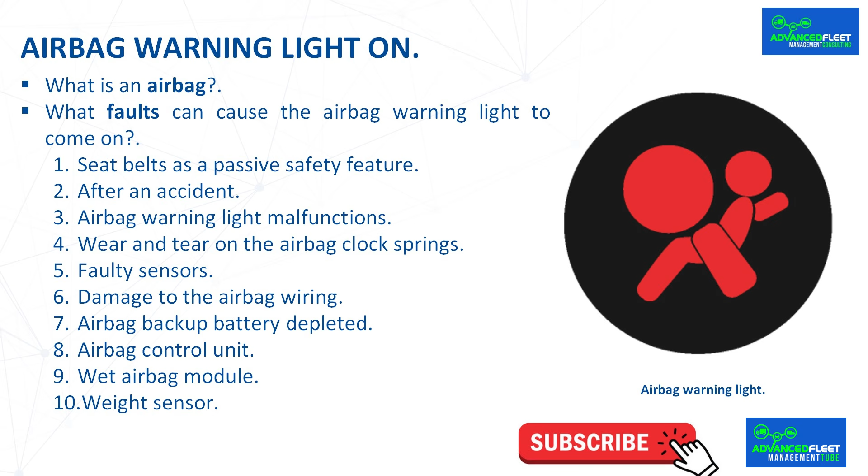Airbag warning light on. What is an airbag? Airbags increase safety inside the car, as their function is to prevent the driver and passengers from hitting any part of the passenger compartment, such as the steering wheel, doors, or any other element.

The airbag is one of the fundamental passive safety systems incorporated into cars, and one that we don't usually think about until a warning light comes on in the instrument panel, either because we have had an accident or because there has been a fault.

When the airbag warning light comes on, it means that the system is not operational. For safety reasons, the car alerts us that this airbag is disconnected and will not work when needed. Therefore, it is essential to fix this problem as soon as possible.

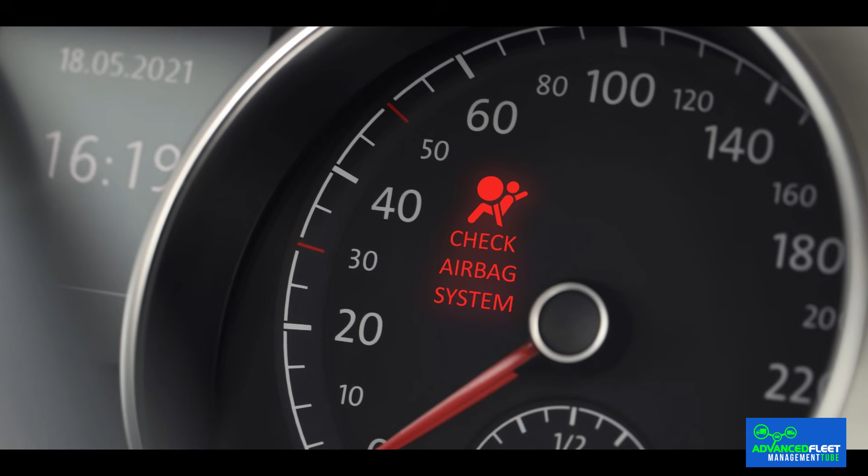It is not safe to drive with the airbag warning light on. The light indicates that there is a problem with the airbag, so in the event of an accident, it may not deploy properly. This reduces the effectiveness of the vehicle's safety features. Therefore, it is important to address the problem immediately to ensure safety.

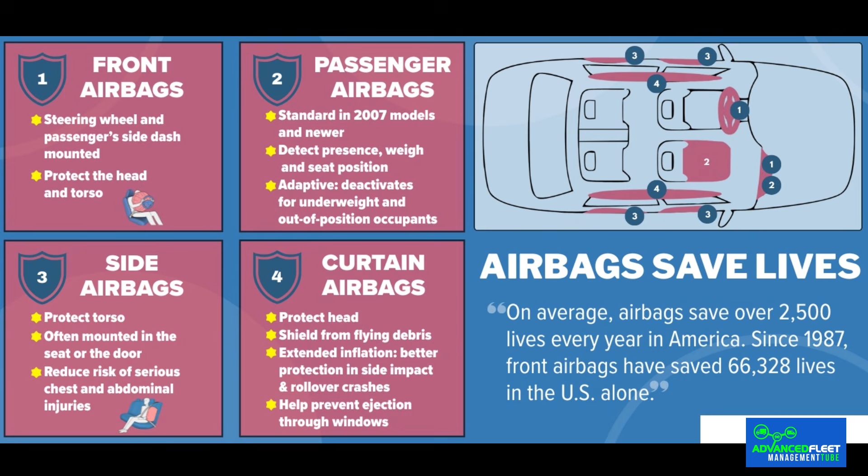What faults can cause the airbag warning light to come on? The airbag light, which may be red or orange depending on the manufacturer, does not indicate which specific airbag is malfunctioning. It could be the driver's airbag, the passenger's airbag, the curtain airbag, the side airbag, or even the pedestrian airbag, which is stored under the hood of some cars and deploys to improve pedestrian safety in the event of a collision. Seat belts as a passive safety feature.

The airbag light may also come on due to the position of the seat belt. The seat belt buckle, where it is attached to the car body, has pretensioners that, in the event of an accident, prevent it from retracting and the passenger's body from being thrown forward.

For example, when we are at a traffic light and someone rear-ends our vehicle at low speed, these pretensioners are activated, even without the airbag being deployed, as the airbag only inflates in the event of sudden deceleration. If there is no impact, the airbag will not deploy.

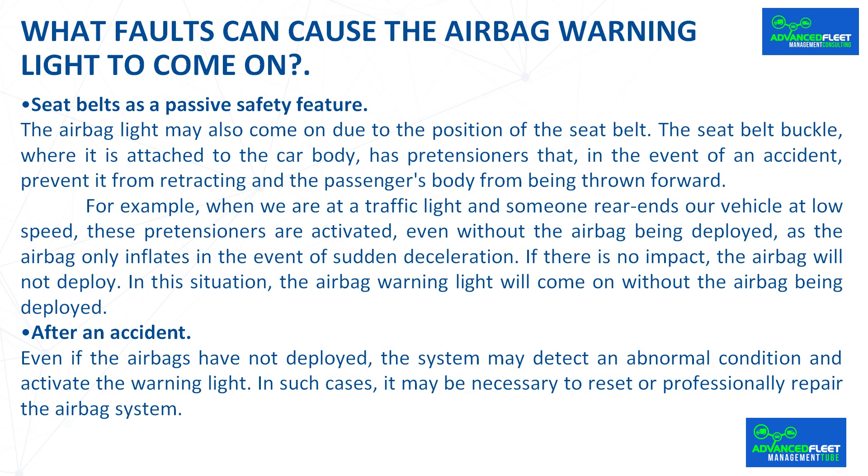In this situation, the airbag warning light will come on without the airbag being deployed. After an accident, even if the airbags have not deployed, the system may detect an abnormal condition and activate the warning light. In such cases, it may be necessary to reset or professionally repair the airbag system.

Airbag warning light malfunctions. The airbag warning light on the instrument panel usually illuminates when there are faults in the connections. Airbag cables are usually located under the driver's and passenger's seats. If the seat is moved to slide the bench forward or backward, these cables can sometimes be damaged.

The solution is to disconnect and reconnect these cables. If the warning light is no longer present when you start the vehicle, the airbag problem has been solved. Some manufacturers recommend soldering these cables to prevent them from becoming disconnected and subsequently failing.

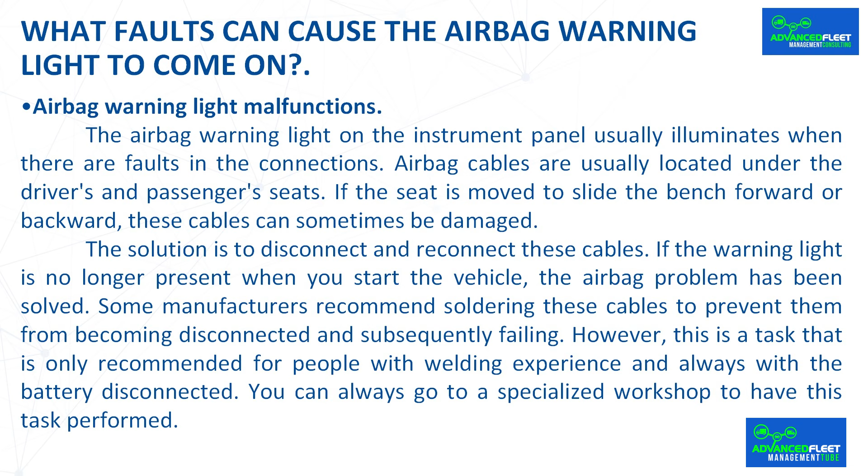However, this is a task that is only recommended for people with welding experience and always with the battery disconnected. You can always go to a specialized workshop to have this task performed.

Wear and tear on the airbag clock springs. One of the steering wheel components related to the airbag is the airbag clock spring. This component can wear out over time as it is constantly manipulated in its location. It connects the bag mounted inside the steering wheel to the electrical system.

This is a serious problem, as it renders the system inoperative in the event of an accident. In this case, removing the steering wheel is complex and requires diagnostic devices to reconfigure the system. It is best to go to a repair shop where you will be charged between €300 and €400.

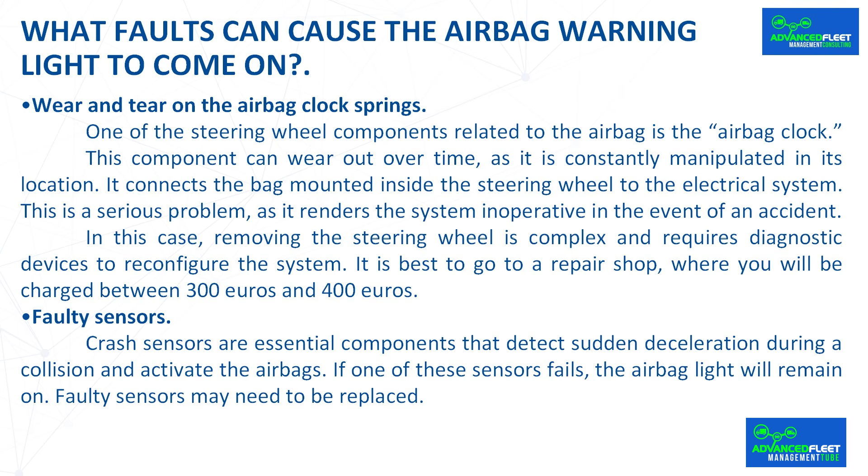Faulty sensors. Crash sensors are essential components that detect sudden deceleration during a collision and activate the airbags. If one of these sensors fails, the airbag light will remain on. Faulty sensors may need to be replaced.

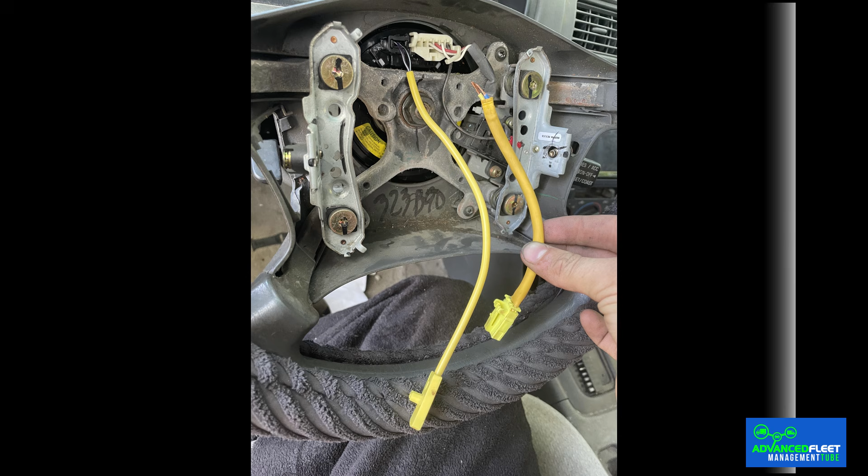Damage to the airbag wiring. Problems with the airbag system wiring can cause false signals or prevent the airbag from deploying. This can occur due to corrosion, wear and tear, or if the wiring has not been handled carefully during repairs.

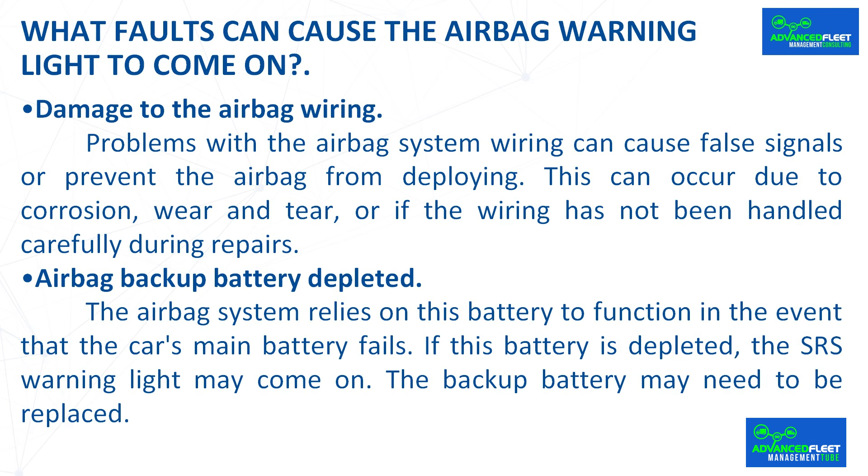Airbag backup battery depleted. The airbag system relies on this battery to function in the event that the car's main battery fails. If this battery is depleted, the SRS warning light may come on. The backup battery may need to be replaced.

Airbag control unit.

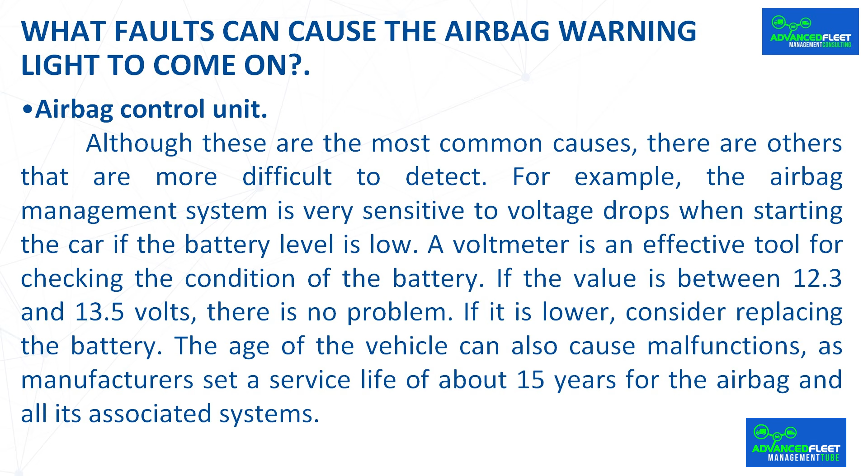Although these are the most common causes, there are others that are more difficult to detect. For example, the airbag management system is very sensitive to voltage drops when starting the car if the battery level is low. A voltmeter is an effective tool for checking the condition of the battery.

If the value is between 12.3 and 13.5 volts, there is no problem. If it is lower, consider replacing the battery. The age of the vehicle can also cause malfunctions, as manufacturers set a service life of about 15 years for the airbag and all its associated systems.

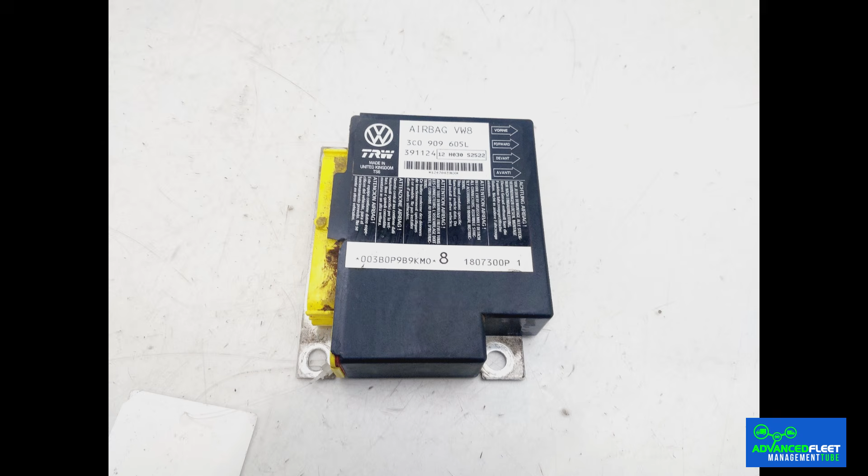Wet Airbag Module. The airbag can be damaged if exposed to external agents such as water. This is one of the most common reasons why the airbag warning light comes on without the need for repair. This usually occurs in cars that have been exposed to heavy rain, such as in the case of flooding, or in cases where the owners have spilled liquids on the seat.

In today's cars, the airbag module is located just below the seats. It is usually upholstered and waterproofed, although frequent use can wear out these coverings. Corrosion of the module due to moisture can activate the emergency warning lights.

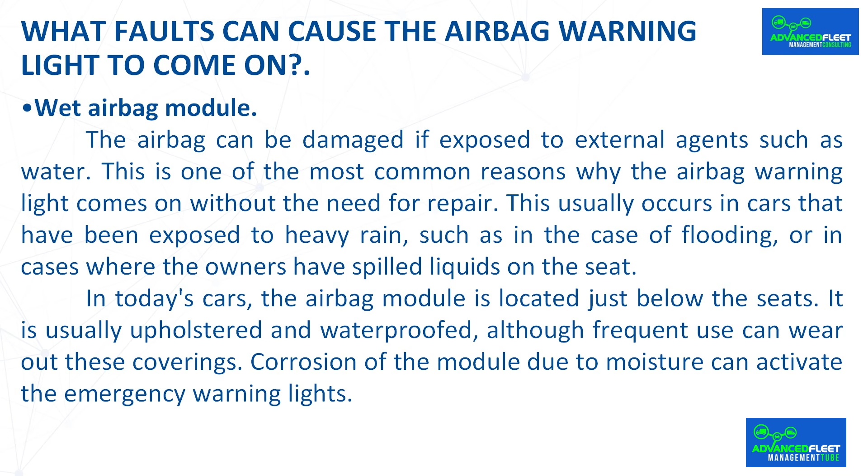Weight sensor. A fault in the passenger seat weight sensor is another possible malfunction related to the airbag warning light. This sensor determines whether someone is sitting in the passenger seat and is activated when a minimum weight is exceeded. It is very important that this sensor works properly. If it is not operational, the airbag will not activate in the event of an accident.

This sensor is designed to save costs in the event of an accident. Why would an airbag deploy if there is no one in the passenger seat?

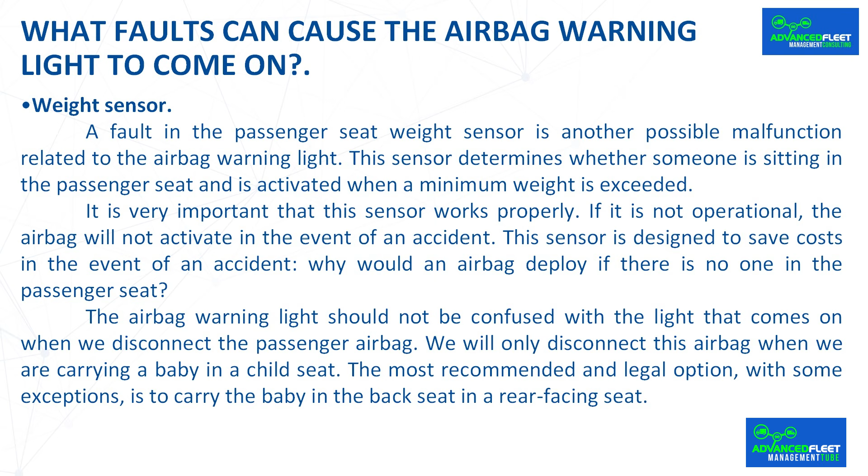The airbag warning light should not be confused with the light that comes on when we disconnect the passenger airbag. We will only disconnect this airbag when we are carrying a baby in a child seat. The most recommended and legal option, with some exceptions, is to carry the baby in the back seat in a rear-facing seat.

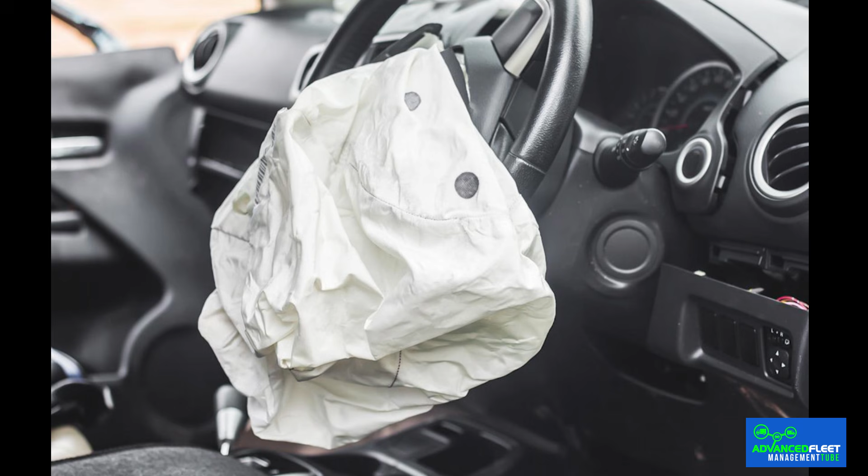Replacing an airbag is expensive. In most cases, when an airbag has deployed, the steering wheel must be replaced except for the rim because the bag is integrated into this part. In the case of the passenger seat, the part of the dashboard where the bag deployed must be replaced.

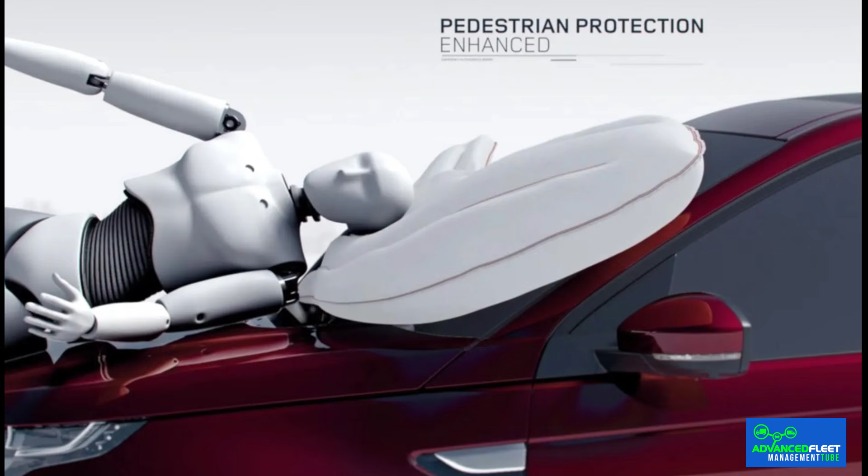If the pedestrian airbag has been activated and has not been damaged, it does not need to be replaced like the others. It could be put back inside the hood at the height of the windshield wiper so that it would work again. However, in this case, the light would remain on and would have to be removed from the diagnostic system. The cost of replacing this part is high, exceeding €300, because, in addition to the airbag, the control unit and electrical system must be replaced, as recommended by the manufacturers, and subsequent programming must be carried out.

Airbag failure. Serious defect in the MOT. One of the procedures carried out during the vehicle technical inspection MOT is to check that the airbag is working properly. During the inspection, they check that the airbag warning light goes out a few seconds after turning on the ignition and starting the vehicle's engine. If the warning light does not go out, it is considered a serious defect and the MOT will be unfavorable.

Implications for fleet management. The main consequence of the airbag light being on is that the airbag will not deploy in the event of an accident with possible injuries to the vehicle occupants, and the vehicle will not pass the MOT test. The following measures are recommended.

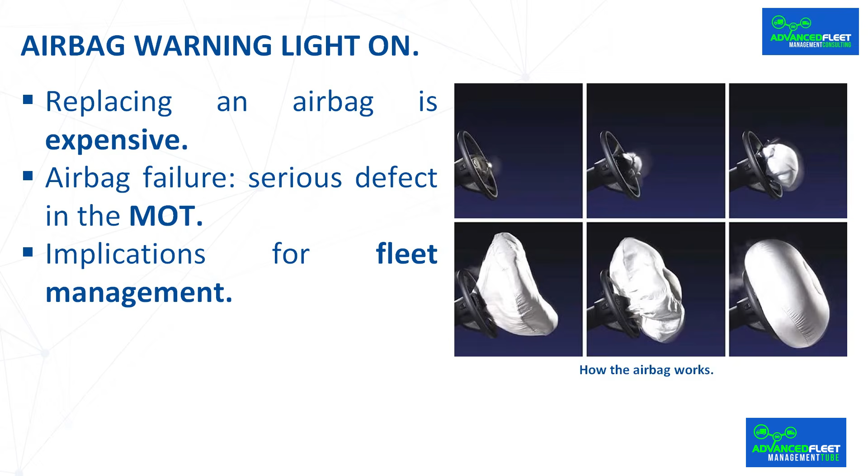Airbag maintenance. Airbag maintenance must be carried out according to the vehicle manufacturer's instructions and within the specified time frame. Vehicle use. If the airbag light is on, it is recommended not to use the vehicle until the airbag has been repaired and the warning light is no longer on. Driver training. The driver must notify the fleet manager or workshop manager that the airbag light is on as soon as possible.

Remote diagnosis. If remote diagnosis is used, we will know in real time that the airbag light is on. It is recommended to set up an alert in the remote diagnosis software to notify us. Airbag replacement. If the airbag has been deployed in an accident, it is recommended that it be replaced with an original one. It is not recommended to use one of dubious origin.